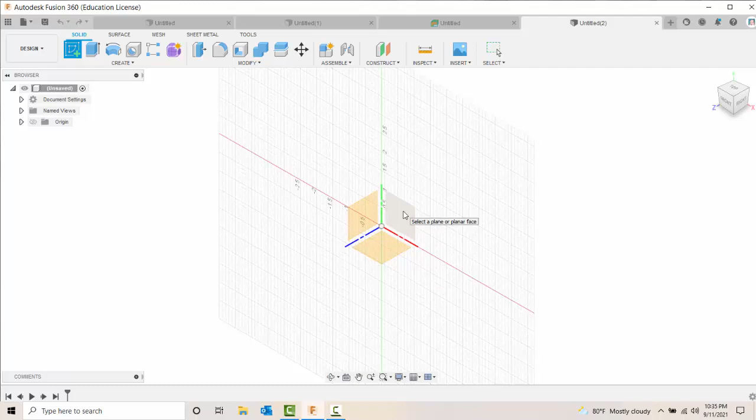Drawing the sketch, we're going to make sure we're in the design workspace. We're going to come over here and say create sketch. I'm going to choose the plane I want to be in. I'm going to pick the XY plane. Now that I picked the XY plane, I can start the line command by coming up here and picking the tool in the ribbon, or I can type in L.

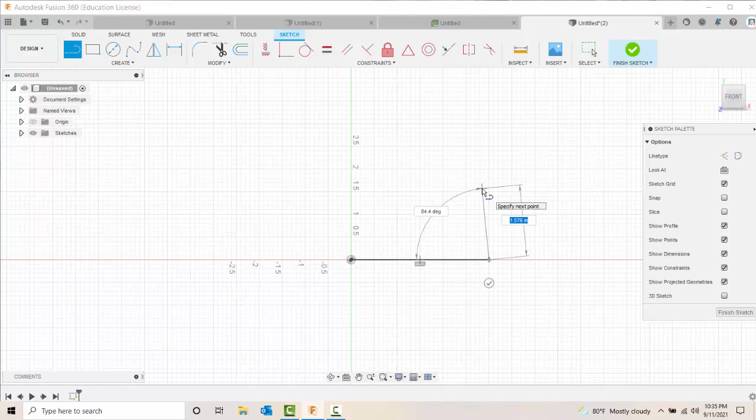I can start the line command by picking in any place and dragging it to any place I want. All right. I don't have to worry about the dimensions if I don't know them. If I happen to know them, let's say I want to go 1 inch up at 90 degrees, I can type in 1, hit the tab key, and type in 90. Okay. And then I can pick a point and keep drawing.

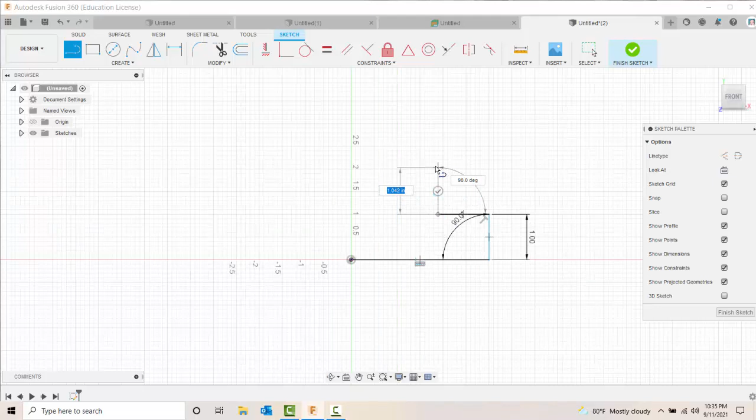So if you know those dimensions, put them in. If not, you can just sketch it to whatever you need. All right. Now, if you hold down the left mouse button, you can build an arc. So I'm holding my left mouse button down and I get an arc. And I can come over here and keep drawing lines and come back, do whatever I need to do.

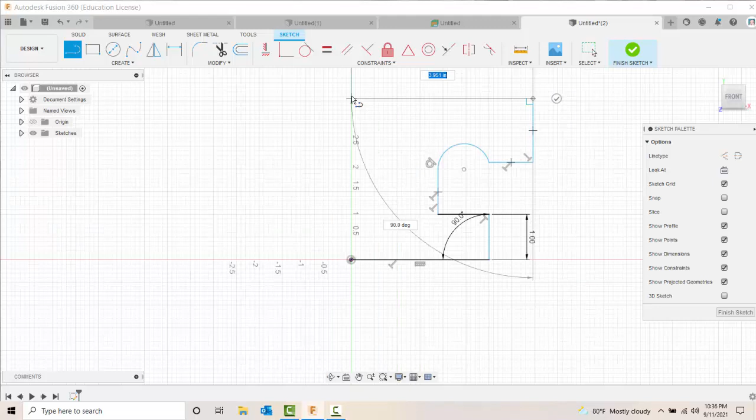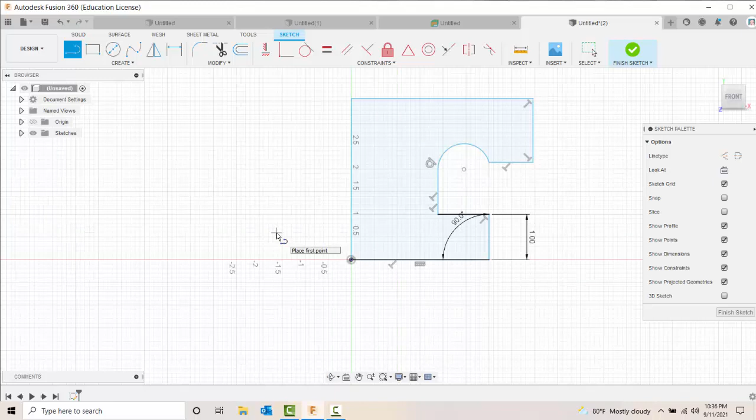Now, if I come back to the beginning, you'll see that my sketch is closed when it turns blue, or it's a closed profile. I'm still in the line command. If I want to finish the line command, I can hit the escape key. I could double click out in the open, or I could right click and go to my marking menu and say OK. I like to hit the escape key.

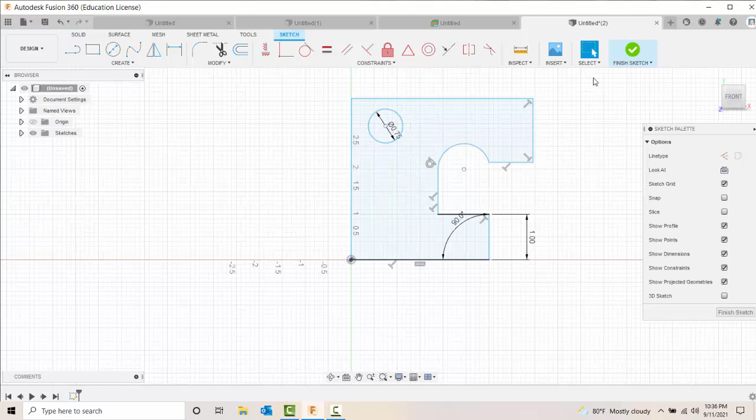When we are done sketching, we can use many other tools here. For example, I can come up here to my center circle, let's say I want to have a hole go in here. I can put that hole in. Let's say I need a 0.75. Boom, I can put that in. When I'm done with the sketch, make sure you hit finish sketch. And I just finished my sketch.

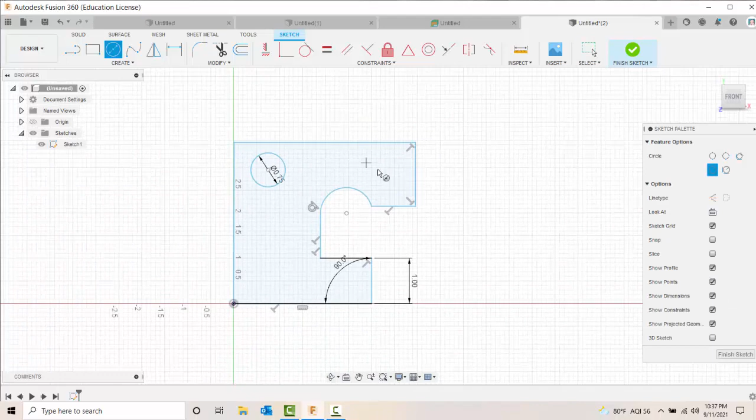All right. If for any reason you want to make an edit to that sketch, you can come over to sketches, highlight the sketch, right click and say edit sketch. Then I can come in and make any edit I want. For example, maybe I want to come right here and put in another hole. I can finish the sketch.

So you can use any 2D geometry in Create to create your sketch. And if you know your dimensions, you should put them in. If you don't, don't worry about it. Just sketch it to the appropriate size and shape, and we'll worry about putting some dimensions in later that will make it the exact size you need. So right now we are creating our sketch, and this is our first sketch in our design.